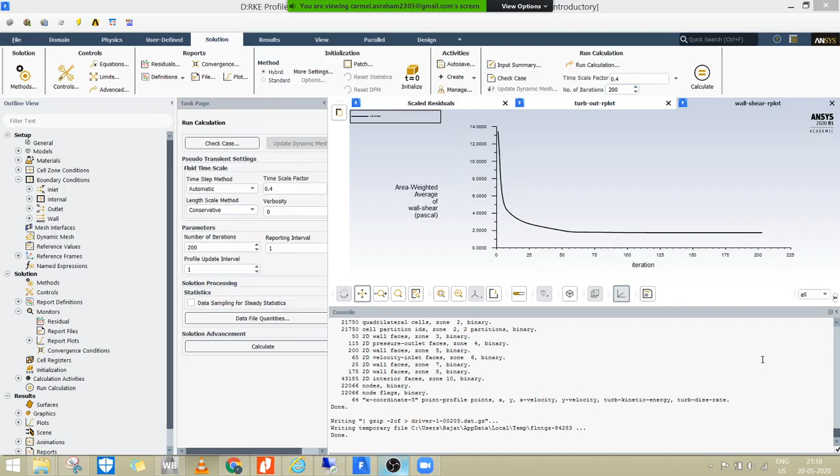Ido, do you want to say something, or did you talk? I don't know. I don't remember. No, I guess not. Omkar, do you want to say something? Rajat. Yeah. Mm-hmm.

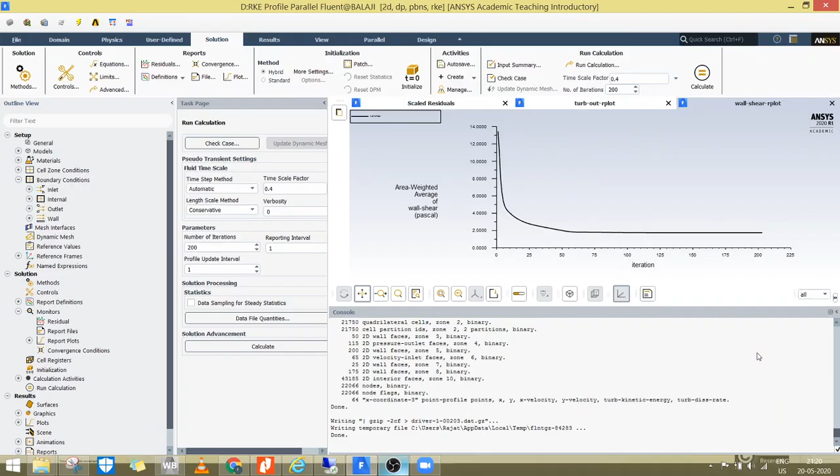Okay, so that's a PDF that I gathered from most of my blog posts, most of the courses I led in Tenzo. Each one of them has a link to a post, which is one of the posts in the blog. You can see the Tennekes and Lumley definition of turbulence. What you can realize from that is that turbulence is a little bit hard to define. It's the last unanswered question of classical mechanics.

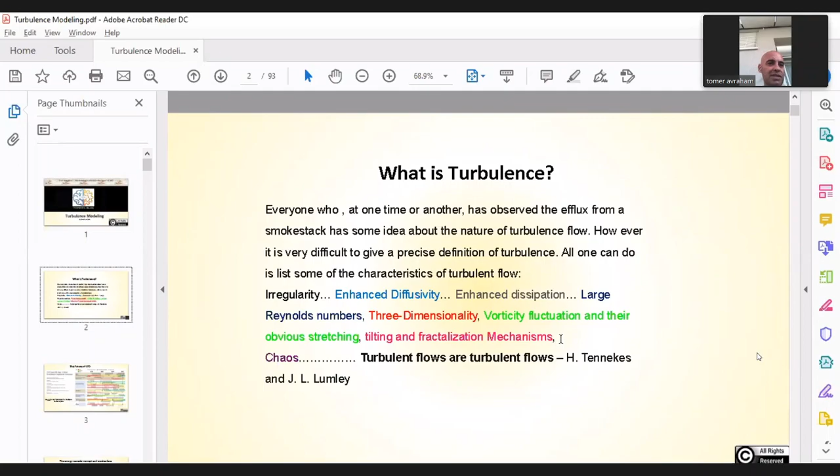There's a $1 million prize, not for solving the Navier-Stokes equations, but for proving there's a smooth solution, or there's a solution at all. Here you see the future of CFD. I love this picture. You can download it if you'd like and read it. It's amazing. But it was written in 2015, and you can see the guys who wrote it. Pretty amazing guys. But they were way off. There's nothing about machine learning and AI in here, but there was an understanding that we have a problem of a human in the loop.

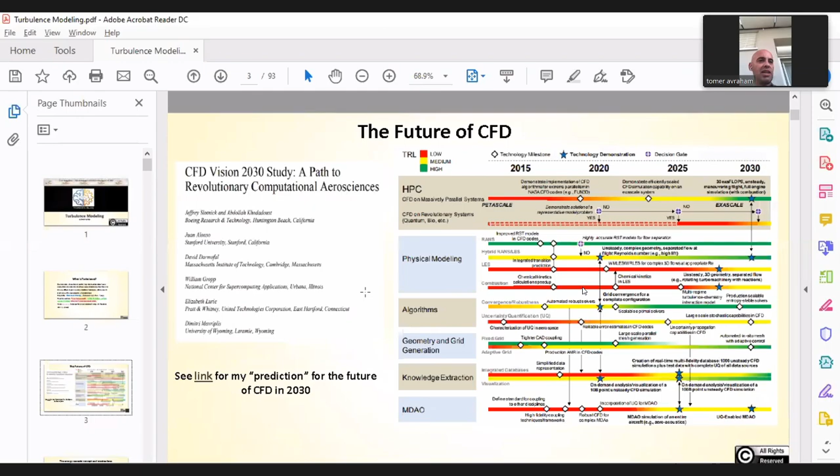So that's what the vision was about. I have a blog, which is pretty pretentious of me, about predictions. Predictions are hard, especially about the future. So everybody knows the energy cascade concept. Big whorls have little whorls, and little whorls have lesser whorls, all the way to viscosity. The famous song.

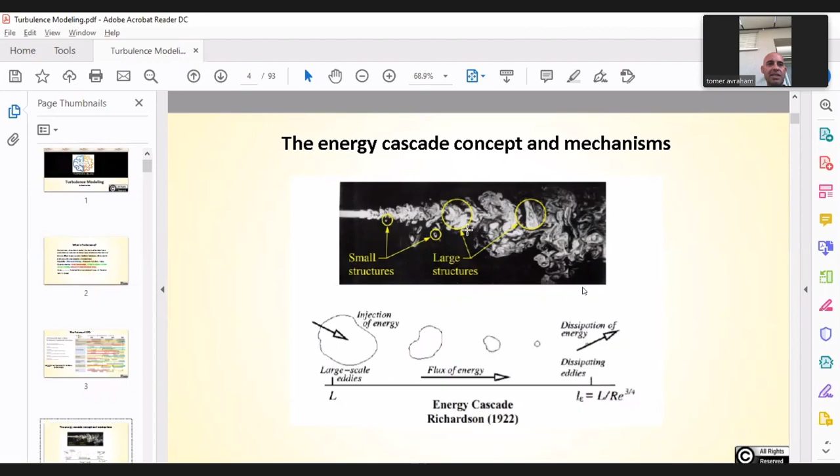Is there anybody here who can see large scale eddies to dissipating eddies? Is there anyone who can tell me what an eddy is? Who would like to try and say what an eddy is? It's a kind of a mechanism, but you can see what large eddies are, small eddies. Part of the vortex stretching effect. There's also a tilting effect, not just a vortex stretching effect. The vortex stretching effect is how turbulence is supposed to happen. But there's also a tilting effect.

Some of this work was open to the world in the 70s when Andrei Kolmogorov's work moved a little bit to the west. And amazingly, and we're going to talk about it later, that's when most of the RANS modeling started, also in the 70s. Most of us attribute turbulence to maybe Navier-Stokes, but it's probably Osborne Reynolds with his famous experiment about Poiseuille flow and a Reynolds number of 2,300, right, at which he saw the flow become turbulent.

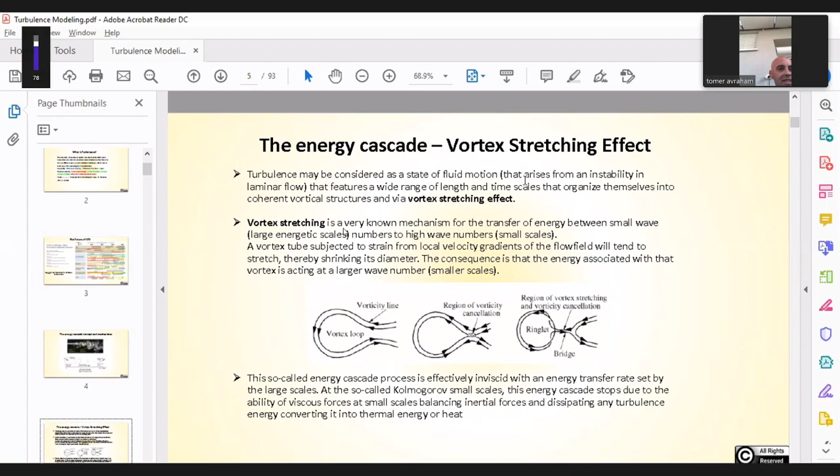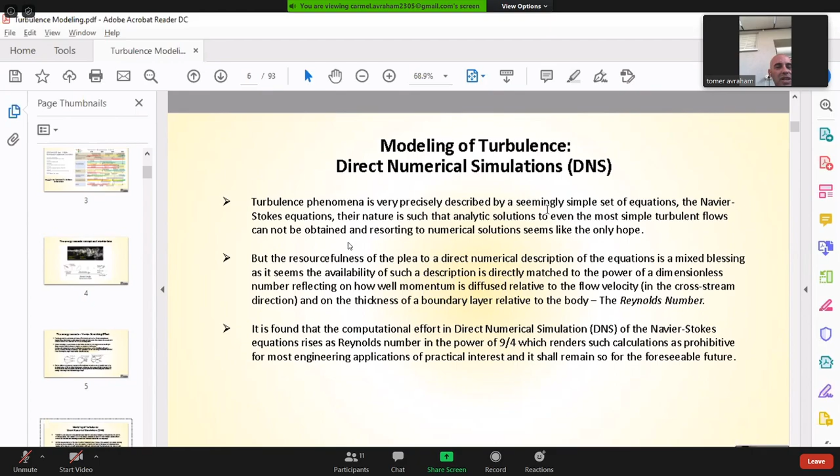Direct numerical simulations, this means we model all the scales. There is no model in the model. In direct numerical simulations, the computer resources rise as Reynolds to the 9/4. If you consider time, it's about Reynolds to the power of 3. That's a huge number. And every publication that addresses DNS says it would not be possible in the foreseeable future.

So that's a little bit about DNS, a little bit about the energy cascade, the universal cascade, the integral scale, the inertial subrange, and the Kolmogorov scale where the eddies turn into heat, and from there there's a spectral gap between the continuum and the molecular range, mostly represented by the Knudsen number. Without it we'd have problems to solve equations. In turbulence, energy comes from large scales, goes through the cascade and dissipates on the small scales. You have some pump pushing work into the machine, and you have losses on the way by friction, by pressure.

Kolmogorov is one of the heroes of mine. He did a lot of work in fluid dynamics. Most of you probably don't know he did a lot of work in computer science too. He has the Kolmogorov complexity, like how you can represent a number with the least amount of data. A number like pi would need an extremely large amount of data to store, actually, but you can use the word pi, and then...

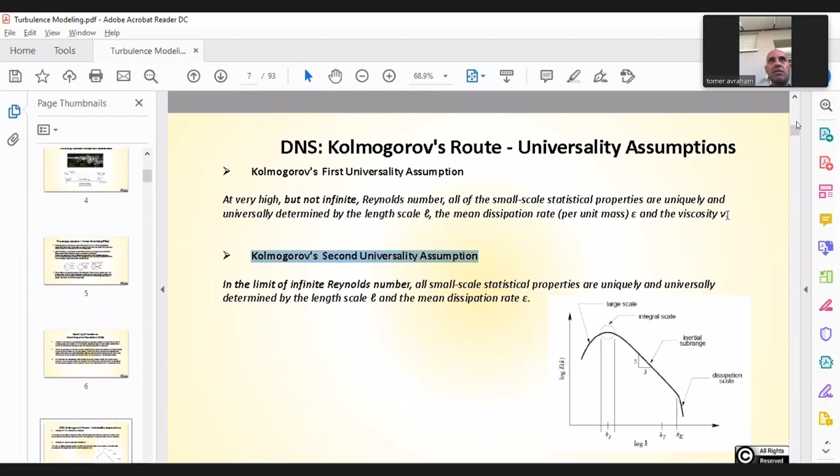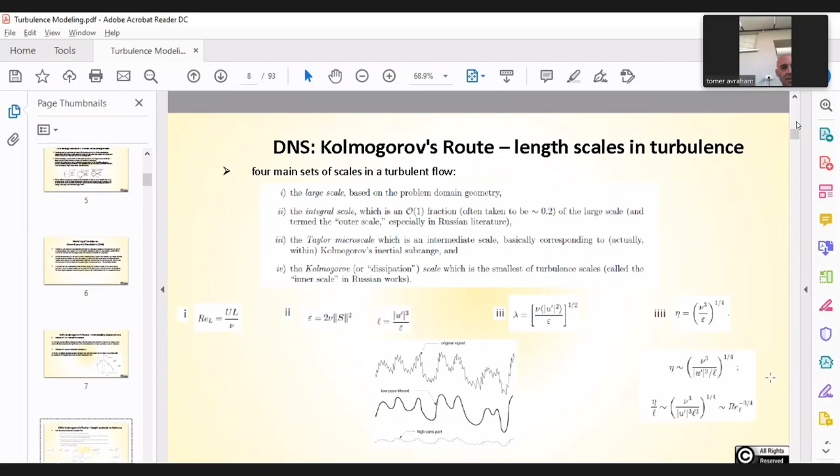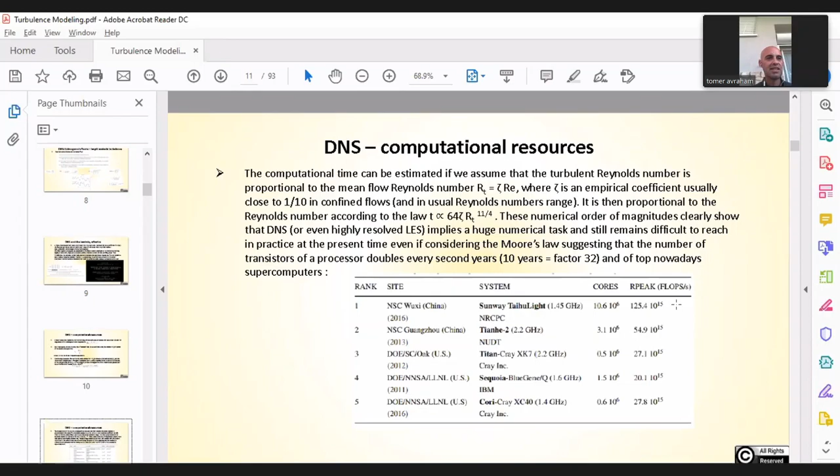That's actually somewhat of a measure of the amount of vorticity that you have in a flow and its magnitude. So we can go on. Computational resources. That's a little bit old. I guess they have now bigger and better supercomputers. Still, Spalart's assumption was that even LES would not be feasible as an engineering tool for mass production till 2070. Okay, now we'll start with the...

So, mixing length theory. I think most of you know about it. You can't really vote if you know about it or not. I have a whole post about it. I'm not going to go into it too much. But what the mixing length theory does, it manifests the Navier-Stokes as emergent equations. Navier-Stokes are able to really predict flow behavior due to the spectral gap that we have between the molecular kinetics and the continuum assumption. We check that by the Knudsen number, and then we can use stuff like velocity and viscosity and temperature and pressure.

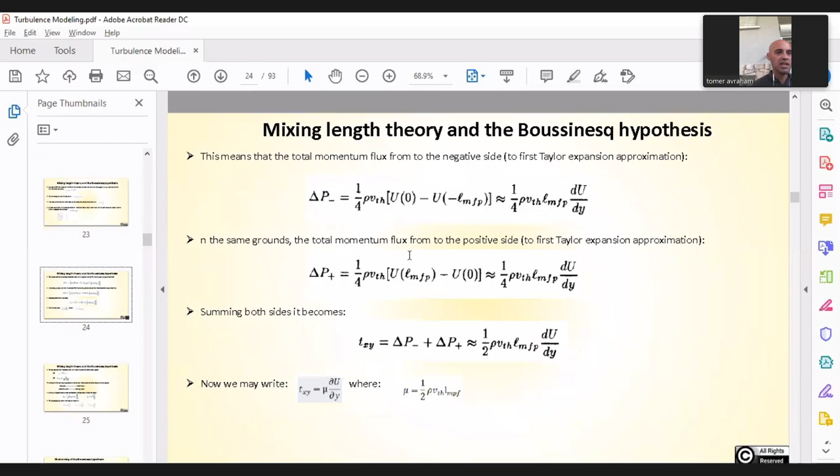These are emergent properties. You can't say an atom has a temperature or the pressure applied on a molecule, because there's no meaning for such stuff. So that's a little bit. Here's the criterion for the Knudsen number. The mixing length theory is something that relates what is a conventional experimental property like viscosity. And it was the beginning of turbulence modeling, the mixing length model,

where we assume that a molecule is a fluid parcel. Sometimes in aerodynamic videos you're told air molecules do that, but no, these are fluid parcels. There are no molecules there. The description is wrong if you use the word molecule. And the mean free path is the mixing length. And then he derived a model where mostly you need to set everything. It's a zero equation model. It works well if you already know the answer, or you made an experiment and know the results, and then you can find the L mix or the velocity mix, but it's not used anymore.

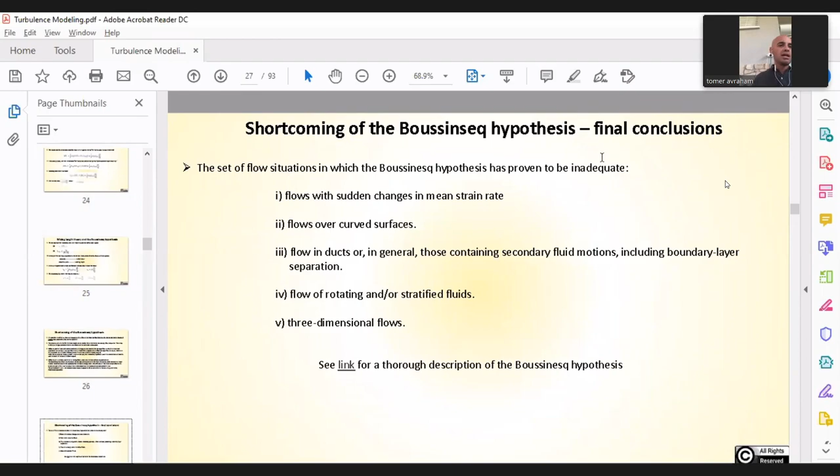It's studied, I guess. The Boussinesq hypothesis stands at the basis of almost everything we do, including large eddy simulation. The Boussinesq hypothesis relates the shear stress to the gradient of the average velocity and the turbulent viscosity.

And by that, here the Reynolds stress. So there is a connection between the Reynolds stress that you see right here and the gradient of the average velocity after we do the Reynolds averaging procedure. And what it means is that we model all of the turbulence.

So it's a little bit funny, because most of the problems solved are turbulent flow. You have some laminar flow problems, like with blood vessels and in micro heat pipes or something like that. But most of the problems we solve have turbulence in them, and we model all the turbulence as long as we're talking about two-equation models. I'm intentionally not talking about one-equation models.

I'm going to talk about a specific one-equation model, which actually is equivalent to a two-equation model. The one-equation model used to be the differential equation for the kinetic energy, and then some kind of specification of the dissipation of the kinetic energy. It's not used anymore. There's no reason to use it. We have enough computing power. You simply won't even find it in code. So I'm not going to talk about it. The K-epsilon model. The K-epsilon model is the most...

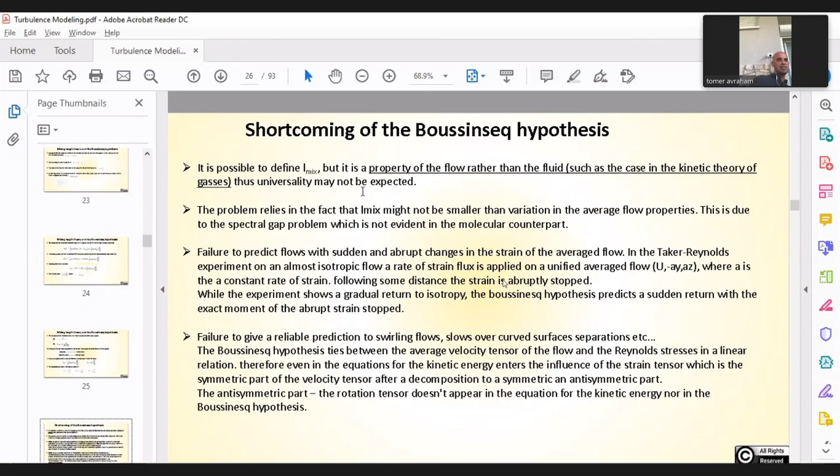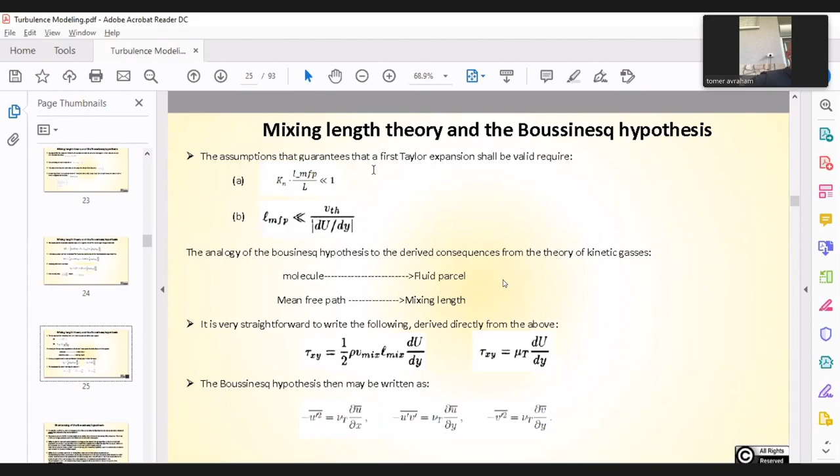We're not going to talk in depth about the shortcomings of the Boussinesq hypothesis, but it's enough to say that it has real problems with swirling flows and curved surfaces, because we take the shear stress as what determines the turbulence, and we don't take this into account.

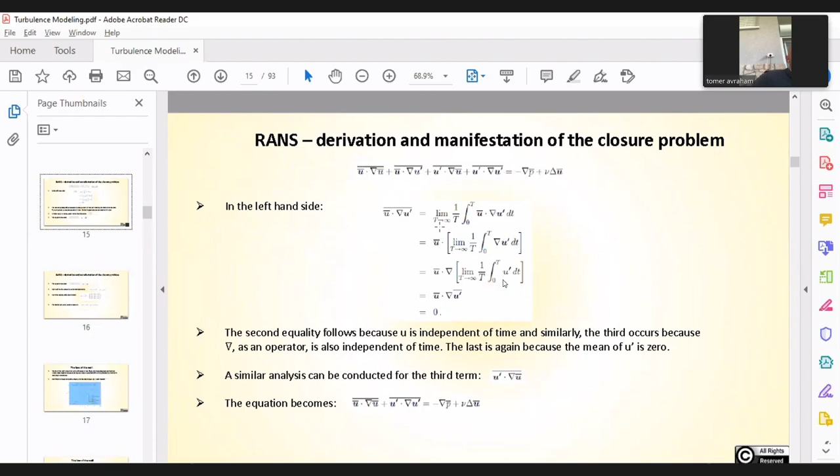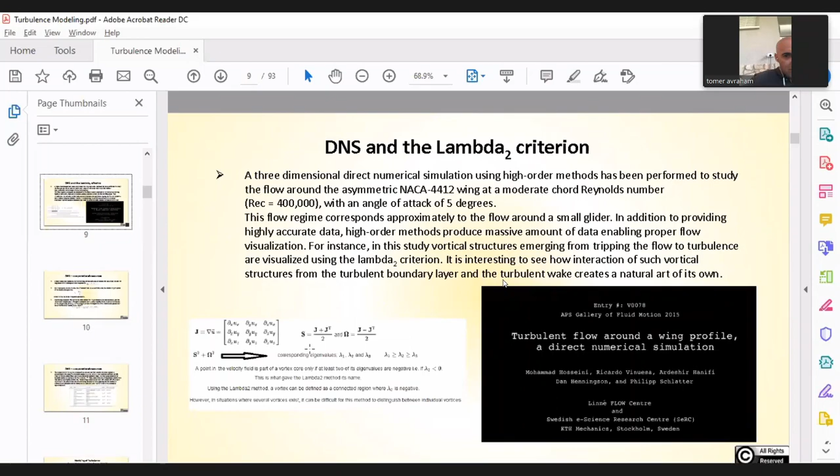If you saw here, there's a little part—when I talked about lambda, you see the velocity. Here we take the stresses, but we don't take the rotational flow. We don't take the part of the rotational flow from the gradient of velocity. So Boussinesq has real problems with curved flows.

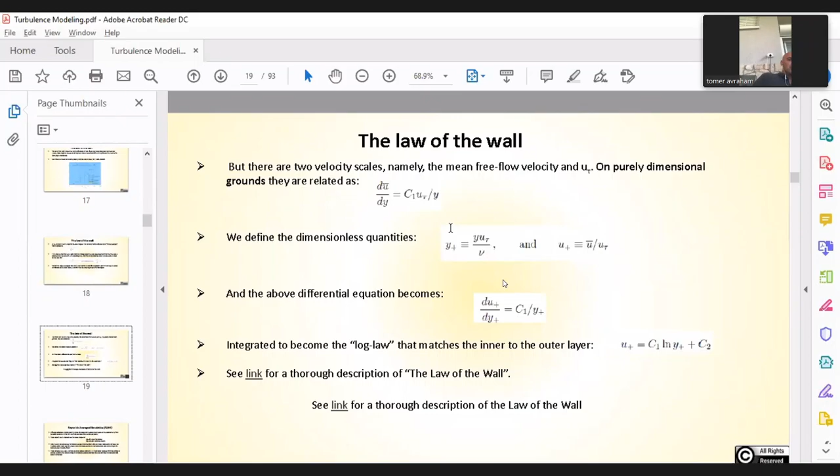It has some more issues, but since you asked about the K epsilon model, we're going to jump right through one of the arguably most important topics, which is the law of the wall, and get to the K epsilon model. Okay.

The K epsilon model was derived in the old school of Imperial College London—Launder, Jones, Spalding, all these guys. The first K epsilon model derived is what we call the standard K epsilon. It's a high Re, so a high Reynolds model, which is kind of cool when you're talking about certain applications.

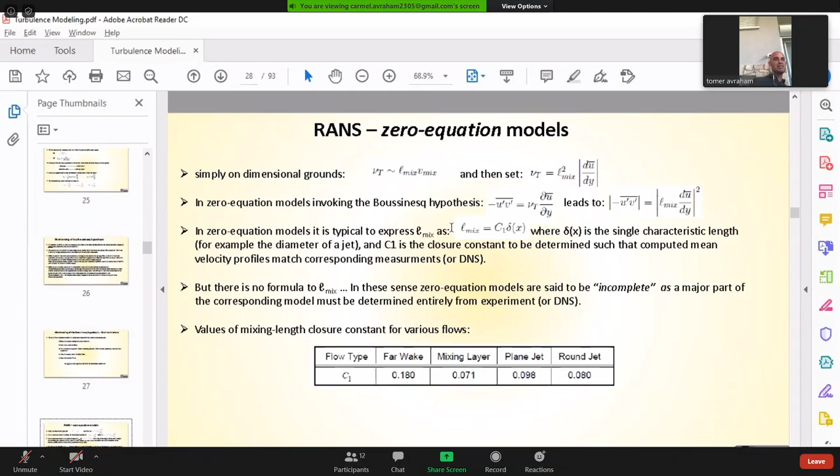But not all flows are high Reynolds flows, and then you kind of get messed up. You can use it because it's simpler—algorithmically simpler, less arithmetic processes. But the standard K epsilon model, I think, is rarely used. Most of you are told by someone: don't use that, use the realizable model instead.

So, directly to the K epsilon model: we have two additional equations. You can see the relation between the eddy viscosity—here it's the dynamic one, but it doesn't really matter, it's just rho, you can put it here—and then it's the kinematic eddy viscosity. And there is a relation between the kinetic energy and the dissipation of the kinetic energy.

You solve two more differential equations, one of them for the turbulent kinetic energy, solved together with the Reynolds Averaged Navier-Stokes equations. The issue with the standard K epsilon model—most of what's discussed here is on the standard K epsilon model—is that it has some problems.

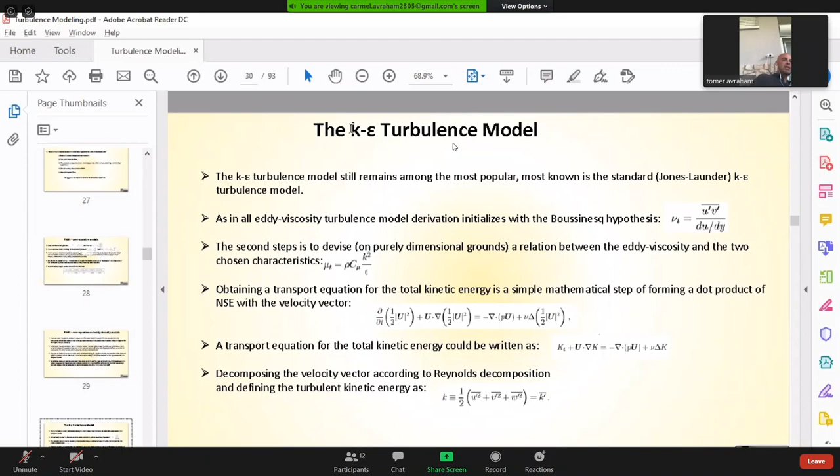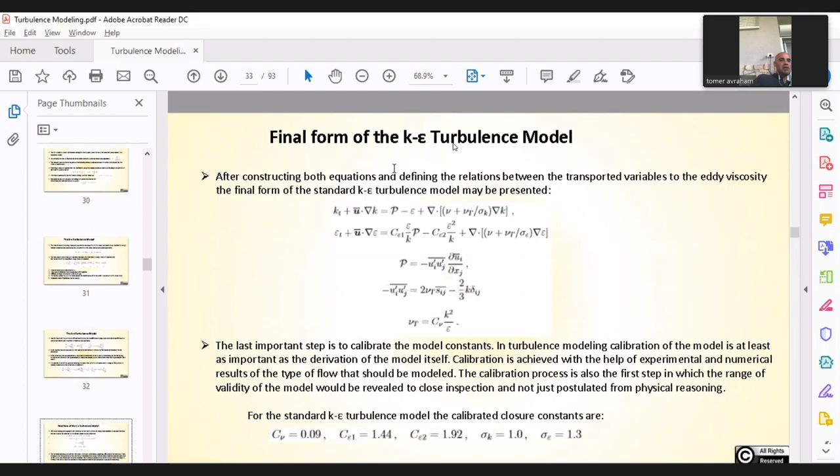It showed that it predicts separation too early compared to what's found in experiments, when we're talking about, say, an airfoil or wing. This means the flow becomes turbulent a little bit earlier. And it's a high Reynolds model, meaning you can only use it when the Reynolds number is above 100,000.

Another major problem is that we didn't talk about the law of the wall yet, but the turbulent boundary layer is comprised of three layers. One of them is the viscous sublayer, which is Y plus. Everybody knows what Y plus is.

If someone wants to say, I don't know what Y plus is, I want to go back and explain what Y plus is, you can say that after I answer this question. Sorry to interrupt—so it has about the Y plus part, like I've studied it, yeah, but is there any physical meaning you can provide to give more intuition to it? Because for me...

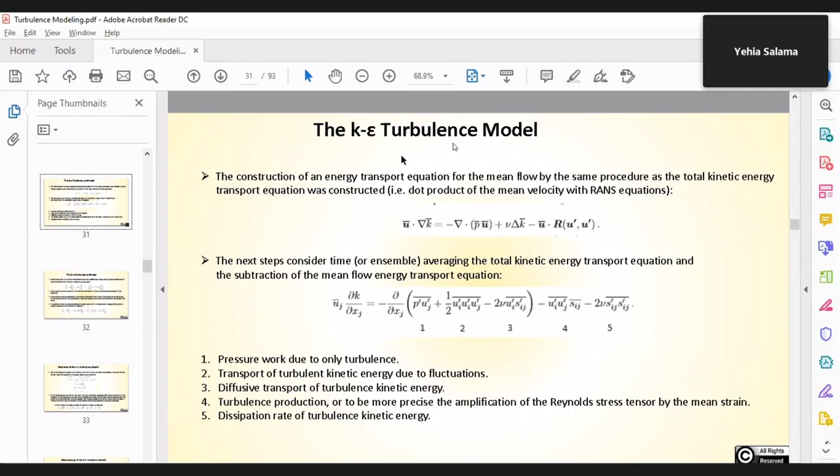This part is between Y plus—it has no dimensions, okay. But you can calculate a Y from this Y plus, even you can see it in the PDF. It's between 1 and 10. There's no smooth connection between them; the connection comes through perturbation theory, which we are not going to talk about.

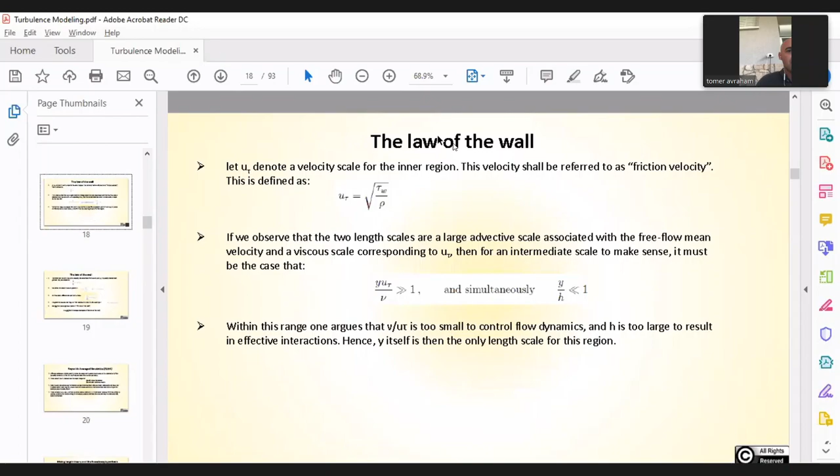Do you want to continue until after 7:30, or do you want to do another Zoom sometime else? That's completely up to you. I'm okay with it, we can go to late, we can go late if you want.

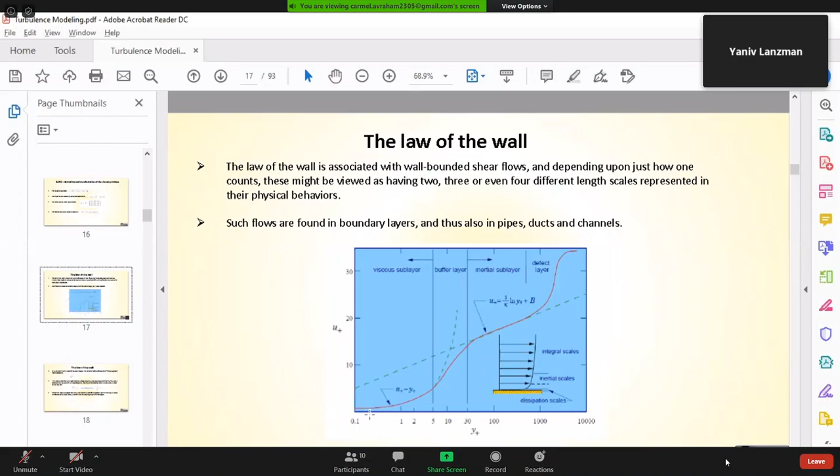Sorry to interrupt. But in a way, the law of the wall that you've just showed is one of the fundamentals in every wind tunnel. I'm talking about this because it's directly connected to what I'm going to tell you about the K epsilon model.

Okay, so this one is the viscous sublayer. It's actually linear, also called the laminar sublayer. This is a buffer layer. Usually in ANSYS Fluent, they use a number which is 11.225 — below that, it's a viscous sublayer; above that...

The log layer has something very interesting in it. It's longer as the Reynolds number is larger, which means that if I have a low Reynolds number, like in turbo machinery, then the log layer could end at about 400, and I need to keep that in mind to have fine resolution to capture the log layer. If it's an airplane, then the log layer can stretch to about 5,000. So there's intentionally no number defining the end of the log layer, and that's very important.

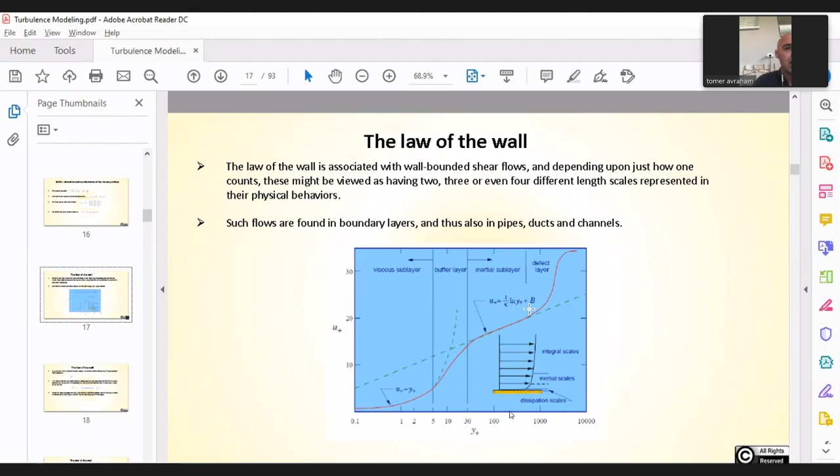After that, it's the defect layer and the free flow. Going back to the K epsilon, what they found out is that the epsilon equation could not be integrated with Dirichlet boundary conditions — meaning epsilon equals 0. It could not be integrated to the wall, which means the model is very problematic. We need something to overcome this.

If it's the standard K epsilon, then what we usually do is use wall functions. We use the K epsilon above some Y plus equal to 30 or even 70, and then connect some wall function which gives us a velocity there — the velocity is not 0. There's no non-slip boundary condition, because we cannot integrate the epsilon equation to the wall. That's why one of the biggest problems with K epsilon is that it is wall sensitive, and it doesn't matter which version of K epsilon you use, it's wall sensitive.

Then there is the realizable K epsilon. The realizable K epsilon has the same problem with being a high Reynolds two-equation model. Most of you are either using the K epsilon realizable or the K omega SST — probably most of you using K omega SST.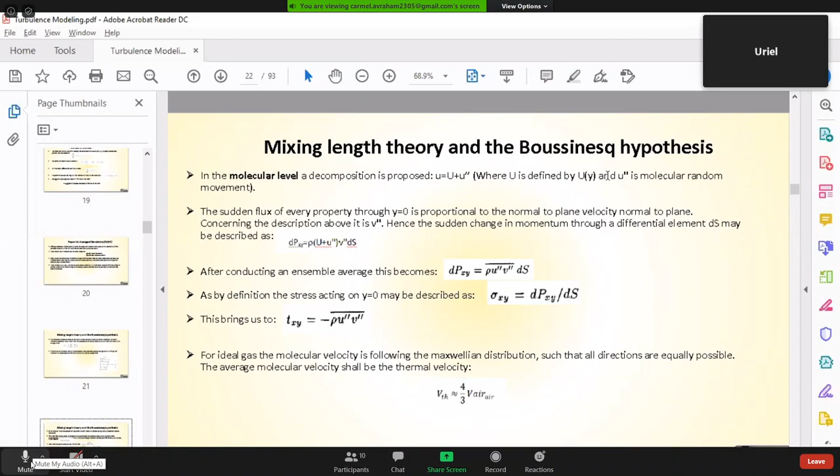Okay, can I ask a question about it? Yeah. About your last sentence, that stagnated flow will perform better.

Will it perform better only software-wise or aerodynamically-wise? I'm trying to ask if you're referring to energized flow, like forcing stagnation points in order to energize the airflow.

No, you just want to predict stagnation when the flow hits a wall, so you don't want to get rubbish there. So it's not just software-wise, it's also aerodynamic-wise.

You could have a place of stagnation — imagine a flute with many pipes going through it, one flute with pipes along the way and a wall at the end. You have a stagnation point there. You want a model which can raise the pressure correctly to divide the flow between those pipes.

So the realizable model has some advantages in this regard. And you don't need to play with the constants — there are constants which were derived by experiments. Usually there's no reason to touch them unless you know what you're doing.

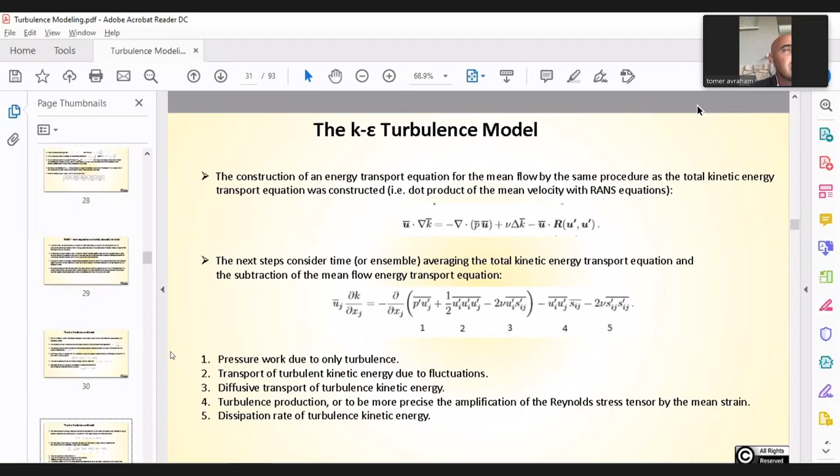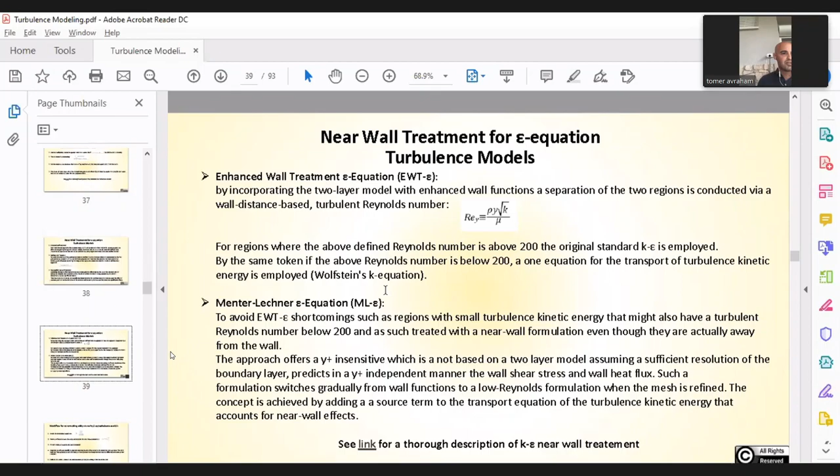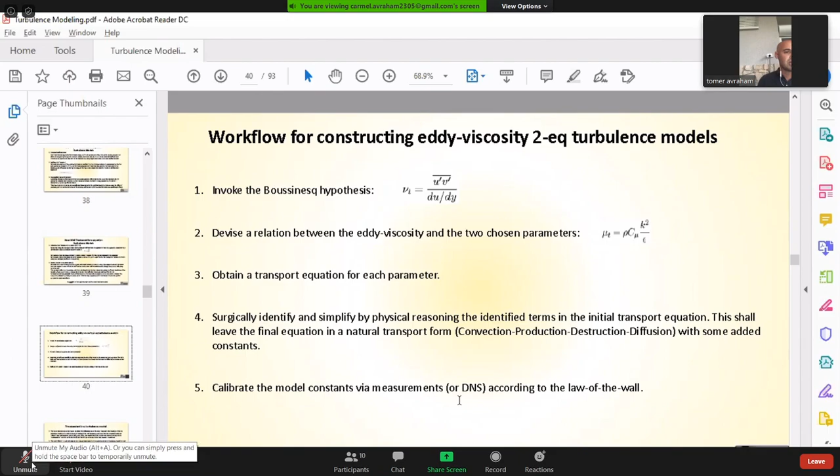And then there's the Bradshaw hypothesis, which I'm going to show you. Near wall treatment, you can read about it also, there's a lot of stuff done on that. I sent you the PDFs, so if someone wants, you can get through the post through the PDF. There's not supposed to be any problem.

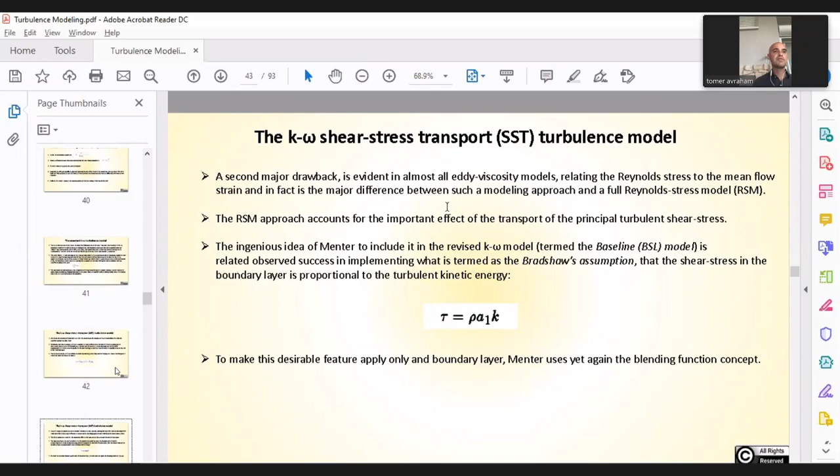So that's the Bradshaw hypothesis. It made a connection between the kinetic energy and the shear stress, and this improved a lot in non-equilibrium flows. That's actually the model most of you use right now. I think the links work here, so if you press any of the links, you'll get to the post and you can read everything you'd like.

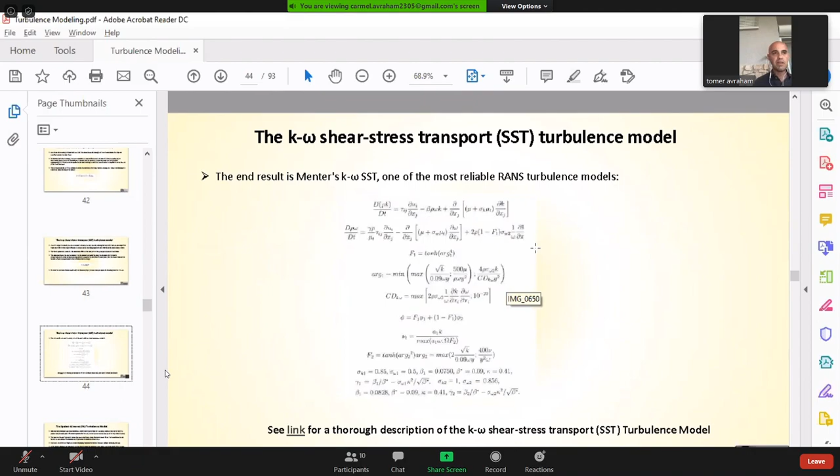Let's talk a little bit about the Spalart-Allmaras model, or if anybody else has a question he wants to ask before, it's a Q&A. I'm kind of a regular course guy, so does anyone have a question? He needs to unmute himself if he has a question. No questions? So, the Spalart-Allmaras model.

Spalart-Allmaras model is a one equation model, but it's a one equation model for the eddy viscosity itself. So if before the eddy viscosity was some C mu times K kinetic energy squared over epsilon, now we have one equation for the eddy viscosity itself. So it's a one equation model, but it should be considered a closed model. We have everything we know, we don't have to guess any length scale or velocity turbulence scale or velocity time scale.

The issue with the Spalart-Allmaras model is that it was... I'm going to have to do a little change here, so you guys should excuse me. Can you hear me? Yes, we can hear. Okay, now it's better, right? Can you hear me now? Yes, we can hear you. You can hear me, not very well, but you can hear me.

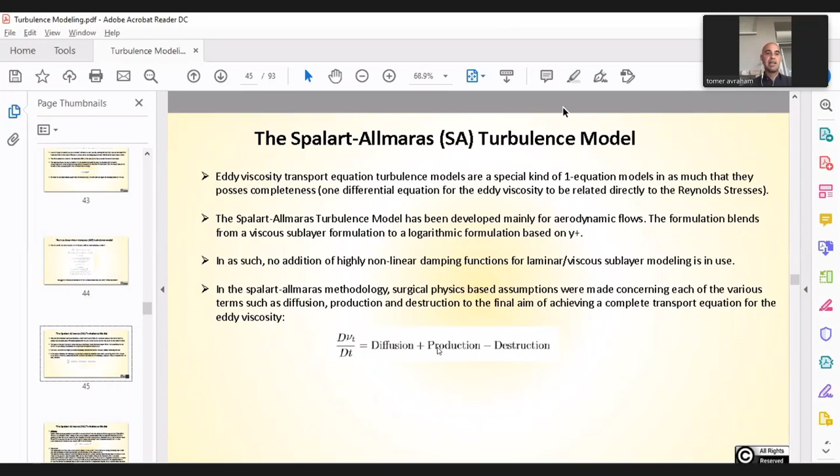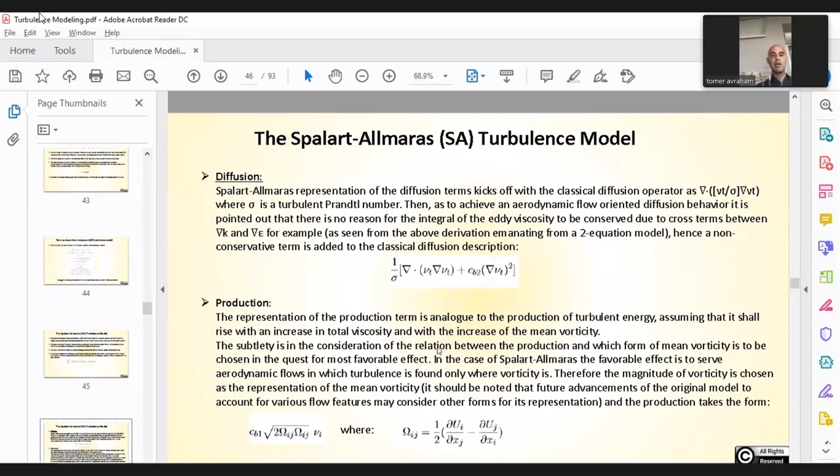So the thing is that Spalart, working for Boeing, derived this model by fine tailoring it to work for aerodynamic flows, external flows. He kept improving the model so it could withstand swirling flows. It's a wall insensitive model, meaning you don't have to use any wall functions. It's the basis for the detached eddy simulation hybrid model, the monolithic hybrid model, which is Spalart's DES model. I think most of the aerospace industries use this model. They can by all means use the K-omega SST, but this one is simply perfectly tailored for aerodynamic flow. So that's kind of cool.

The rotation correction, the transition modeling - I did my thesis on transition modeling, a specific kind called bypass transition. Usually you find bypass transition in turbo machinery. Bypass means it bypasses the natural Tollmien-Schlichting wave kind of way that we usually find on airplanes - little disturbances which turn to coherent structures, which turn to turbulent spots, and then turbulence.

What they did is they used a large amount of data, and that's why it's called LCTM, local correlation transition model. It fits quite a few mechanisms of transition, although it's trustworthy when prediction of the exact point of transition is not of the most importance. There were other ways to calculate transition until then.

It was devised by Volker from General Electric and Menter from ANSYS, and you can use that if you think you have a transition issue. If I remember correctly, sorry for interrupting, this model is used mainly for ducts, and it's also used for turbo machinery. One of their validations shows a helicopter.

But yes, in ducts, especially when you take blood flow as not a Newtonian fluid and you have low Reynolds number, the transition model could improve the results by a huge amount, because most of the flow is laminar, and then you have some areas where turbulence develops because of the geometry of the duct, or something like that.

Exactly like that. Because especially, sorry for interrupting again, this model is used a lot, especially in two-stroke engines. I remember when I simulated a lot of two-strokes for fun, as an enthusiast for racing with the racing guys of Italy. We used those models in order to design the inlets and outlets and the ports.

It's Yaniv, right? Yeah. It's Yaniv talking, right? Yeah. Exactly. We spoke about it yesterday. Yeah.

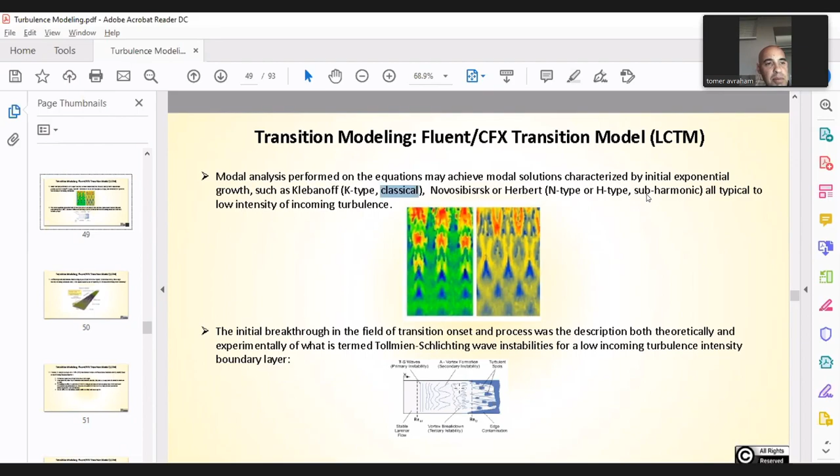Exactly. But again, you should remember that there's no real theoretical basis between the work you see here, which was done by Dan Henningson and Philip Schlatter and all of them, and the work that Menter did. But here you see the bypass transition, my favorite kind of transition.

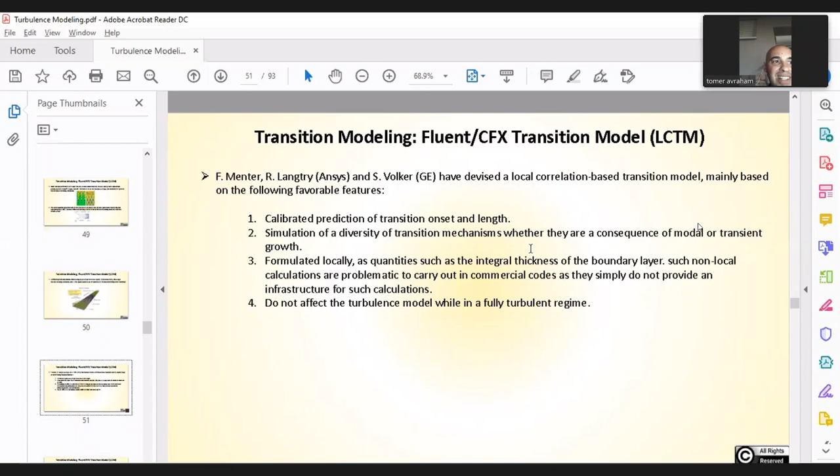Yes, you can use that in ducts. I used it. I didn't use it for a car, but I used it for a duct, which is a vein. Apparently, I had a transition regime there, and you could have seen it, because if you took the velocity profile, you could have seen it's not parabolic, but it's also not like a turbulent profile, which is like a square. Wow, the boundary layer must have been a pain. With ducts. Exactly. Yeah.

Another K epsilon model is the V2F model. The V2F is actually a K epsilon model supplemented by two more equations for V squared and F, which mostly was devised to resolve the problem of swirling flows. My feeling is that the model didn't prove itself too much. It has an elliptic nature. Elliptic nature, when we talk about partial differential equations, is that something that happens in the domain is immediately communicated to the boundary. So it kind of communicates with the wall.

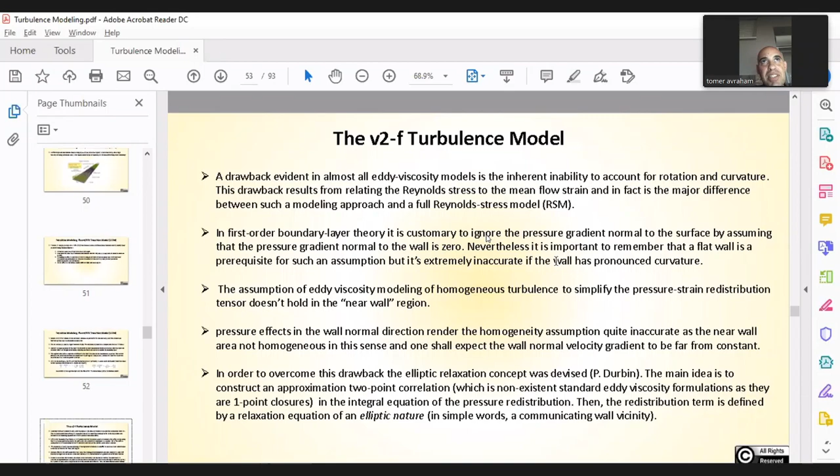It's the same in the K omega model, actually. It's supposed to be a little bit better for flows with rotation and curvature, but in my opinion, and in the opinion of other more esteemed individuals, it hasn't proven its worth, and even in Fluent it's an option. You need to open it. I even wrote here how you open it in Fluent. So that's another K epsilon model.

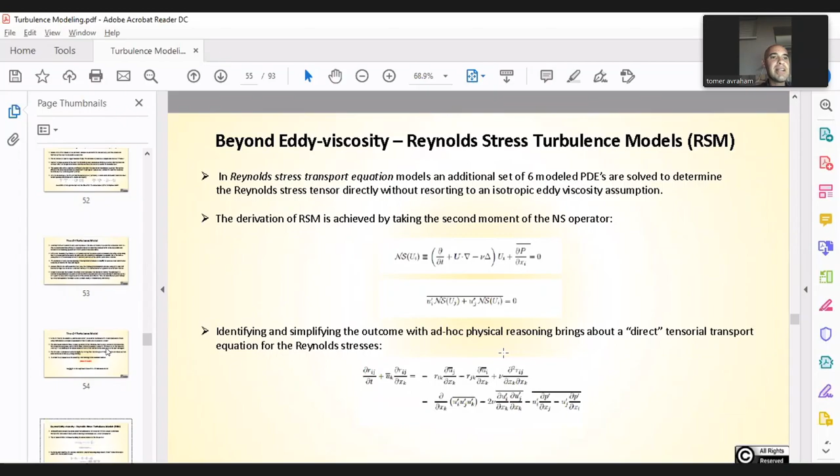Beyond this, there's the Reynolds stress models, which you probably never had the chance to use. If some of you did, please raise your hand. The problem with the Reynolds stress model, it doesn't use the Boussinesq hypothesis. So it solves an equation for the Reynolds stresses. It actually solves somewhat like 6 additional equations beyond those you solve anyway, which is 9 equations, and all of them are very, forgot the word, very coupled. It's supposed to contain more physics, but it's actually very hard to converge, and it's not worth the time, as now we can use hybrid models, which give you more turbulent content. In RSM, in Reynolds stress models, still all the turbulence is modeled.

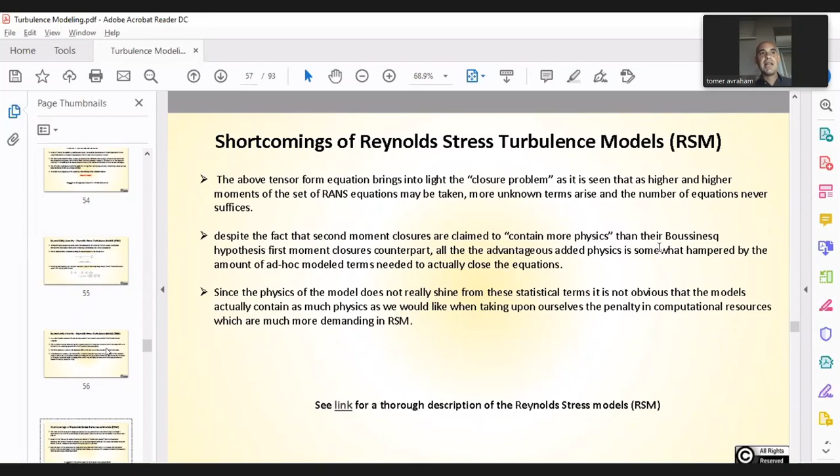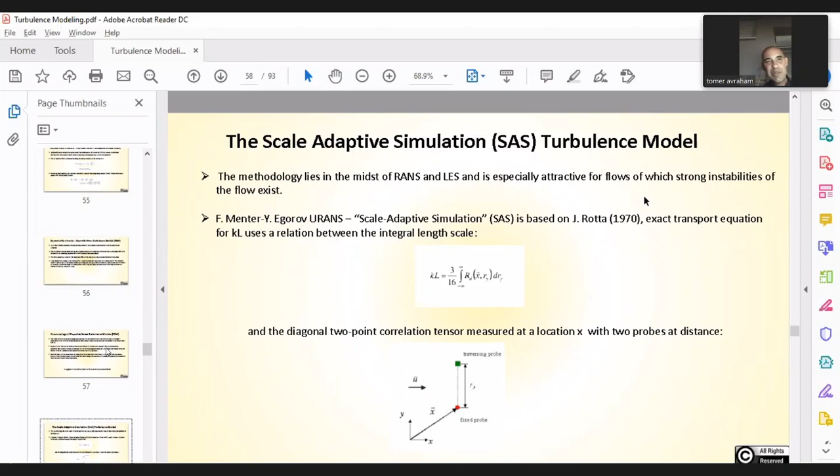Then we go to the scale adaptive simulation model, which I know all of you used a lot. It was developed in about 2003 by Menter and Egorov. Egorov and Menter still work together. I used to see emails between them. They took Rotta's equation from the 70s and made some changes which allowed the model to not break down. What's usually happening is that 2 little eddies combine to 1 big eddy, and we can't see turbulent content in RANS.

This doesn't happen with the scale adaptive simulation, but as far as I see it, the scale adaptive simulation model, which is a transient model, of course, gives you the turbulence content, but it's mostly colorful for directors. You can't derive second order and higher order moments from Fourier content, which is what you have to do in large eddy simulation, for example. So it's not really useful unless you want to produce really beautiful pictures.

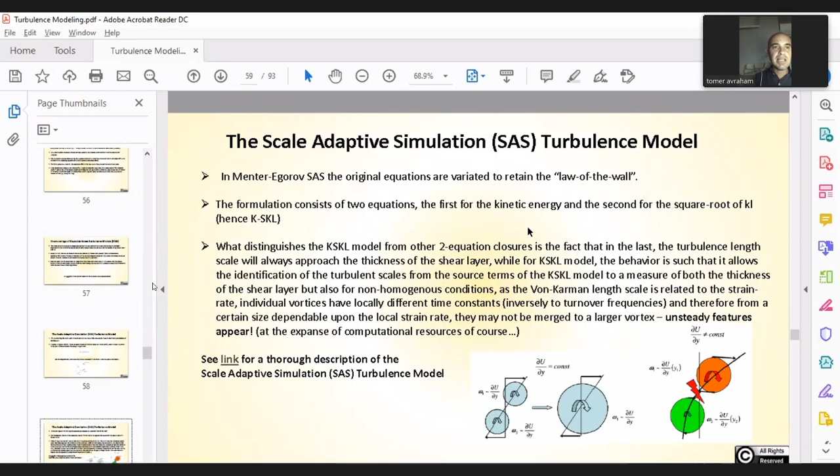Going to ANSYS's recommendations: either use the realizable K epsilon model, which shows good performance in closed spaces, I mean electronic devices where you have turns and stagnation areas. Usually RANS models over-predict corner flows. Okay.

Either they over predict the corner flow. You know what I mean? If you have a square duct, you get corner flows. They over predict the corner flows, or you get total rubbish.

I mean, I call it this, the המפריעים של השכונה. The disturbers, those that make all the noise.

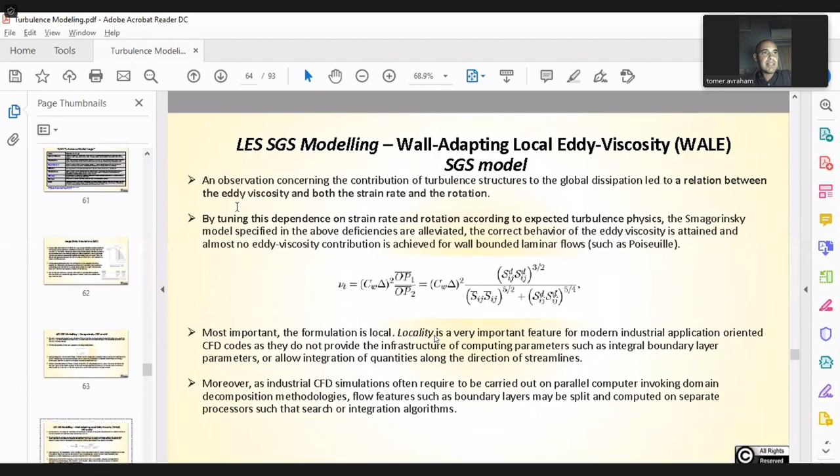Then we're going to have the ability to perform a large eddy simulation of a full airplane. Besides that, you have methods of hybrid-like SGS modeling. LES, large eddy simulation, has much more demands than Reynolds-averaged Navier-Stokes. I mean, the inflow is very important. You must produce a flow which has the right turbulent content, whereas usually when you use RANS, you only define a turbulence intensity and some kind of length scale.

Internet connection is unstable. I don't know why.

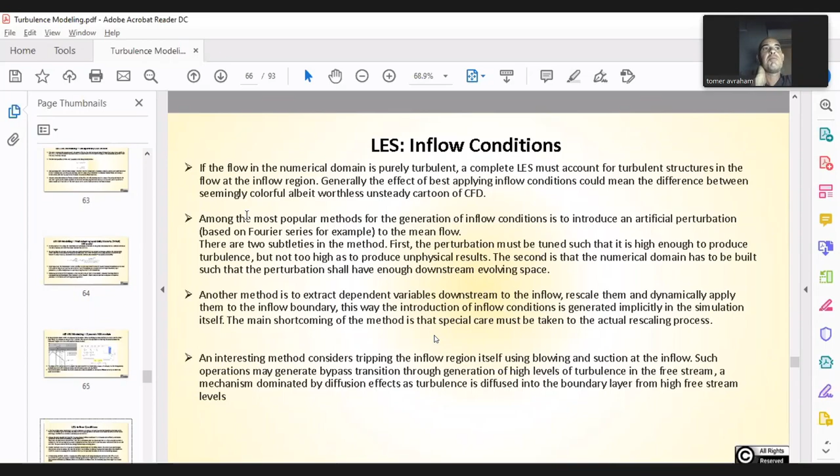So you either have to run a large eddy simulation, if it's a pipe, then use a very long pipe, or you must recycle the results a few times for the inflow conditions, or you can use vortex generators. I think it's all written here, but each method has its issues. You can also trip the flow and create turbulent content, but inflow conditions are very important.

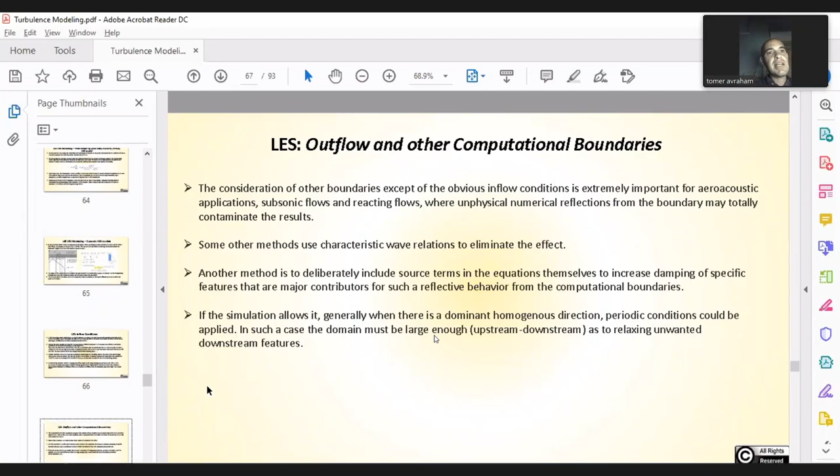Outflow and boundaries are also very important, because if it's compressible flow, an outflow condition could have a backflow effect and ruin the results. So sometimes you must damp the outflow. Generally, there are many issues: spatial and temporal resolution, validation. Validation is very important in

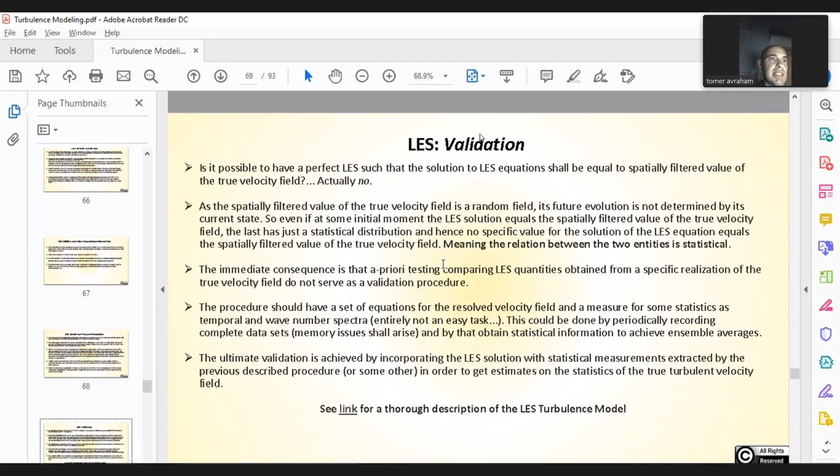large eddy simulation. Usually when we do Reynolds-averaged Navier-Stokes, we're interested in integral quantities like lift, maybe some kind of average velocity and a pressure distribution. In large eddy simulation, we usually want to derive higher statistical moments, to actually understand if we got the right turbulent content, which is kind of an issue. So LES validation is an issue.

Then we go to hybrid methods. There are two kinds of hybrid methods ruling right now. Actually there are three kinds, but two main kinds. One of them is the monolithic, which is the DES family, which includes the detached eddy simulation, where there is some kind of grid size, and if we're lower than this grid size, what happens? It turns to LES, and when the grid size becomes larger, it turns back to RANS.

Then, because you have near-wall problems, you can solve RANS near the wall and large eddy simulation away from the wall, and then you don't have the computational effort problem that you usually have with large eddy simulation. That's a monolithic method. It depends on the grid.

Then there is the zonal method. You actually divide the domain into zones which are large eddy simulation and zones which are Reynolds-averaged Navier-Stokes simulations. Between them there's a gray area which needs to be connected, because when you move from a Reynolds-averaged Navier-Stokes zone to a large eddy simulation zone, you have to have the turbulent content, which you don't get from the Reynolds-averaged Navier-Stokes method. One remedy is to use scale adaptive simulation to have the turbulent content going into the large eddy simulation. There are others.

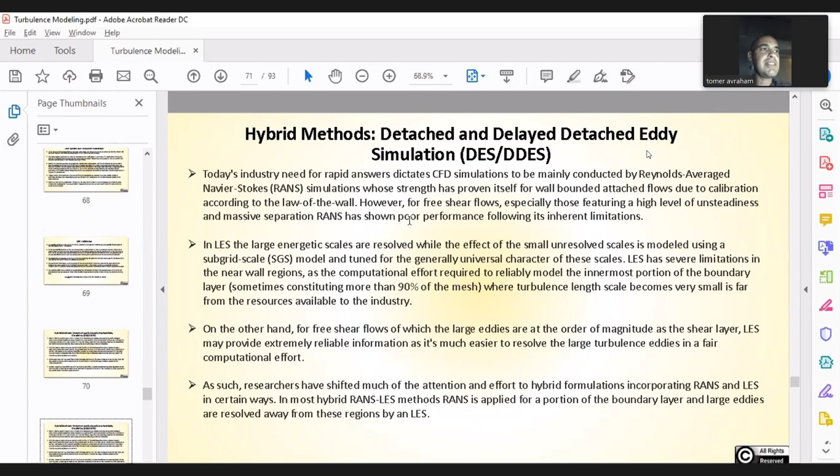That's just short Q&A. It's 8 o'clock. It's getting kind of late. There's a lot in turbulence modeling, isn't it?

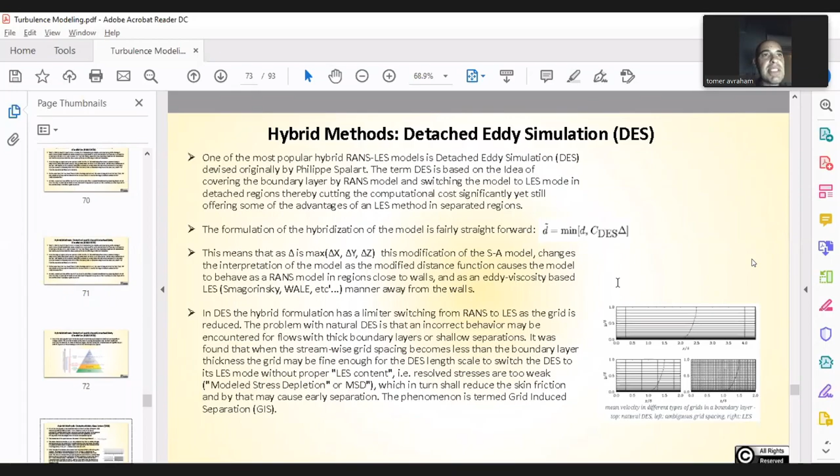Hybrid method, detached eddy simulation. They found a problem called modeled stress depletion, which means the flow turns turbulent, turns to RANS when it shouldn't, and turns to LES when it shouldn't. So they shielded the boundary layer from these disturbances. Out came the shielded detached eddy simulation, and so it goes on and on.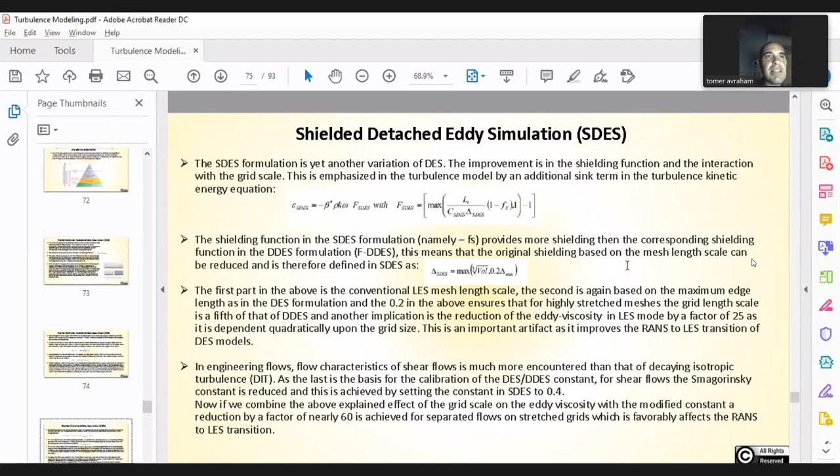And the final one that Menter created in 2016 is the stress-blended eddy simulation, which is not really a model, it's more of a modular approach where you can choose the RANS that you want, because the original detached eddy simulation was with Spalart-Allmaras. The same Spalart-Allmaras you use for RANS, you use for the large eddy simulation. But stress-blended eddy simulation allows you to use your favorite, validated, well-known large eddy simulation with your favorite RANS, and the secret is how the transition between them goes.

And it also allows WMLES. If some of you saw the pictures I put in my posts, that's wall-modeled large eddy simulation, which means you have a very small portion in the innermost part of the boundary layer which is RANS, and all the rest of the simulation is large eddy simulation. And then you can actually do a full airplane simulation. The issue is how you trigger the LES mode, the large eddy simulation mode.

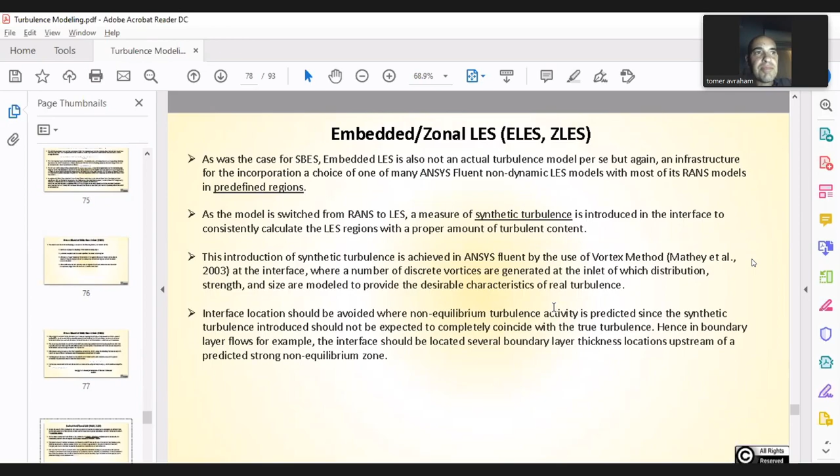Any questions by now? We've talked about embedded zonal LES. These are all the models you have. You have them in STAR-CCM+, and you also have them in Fluent.

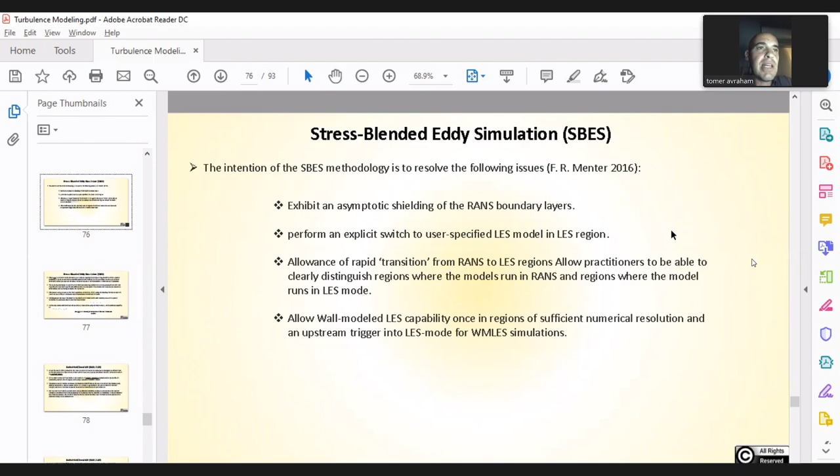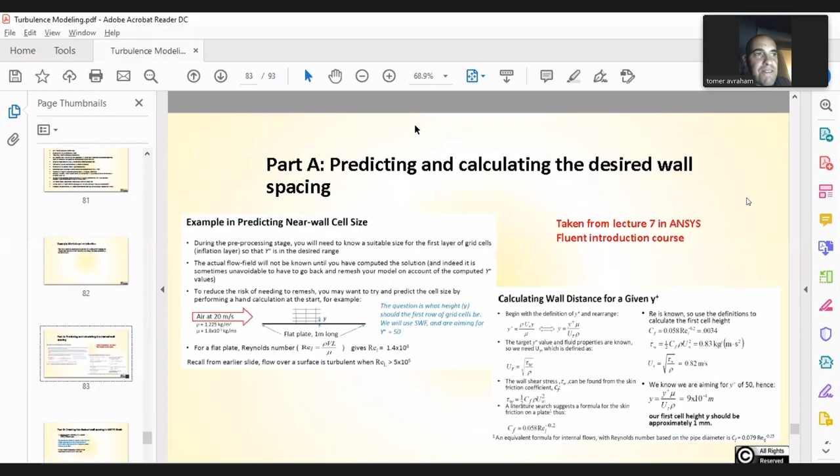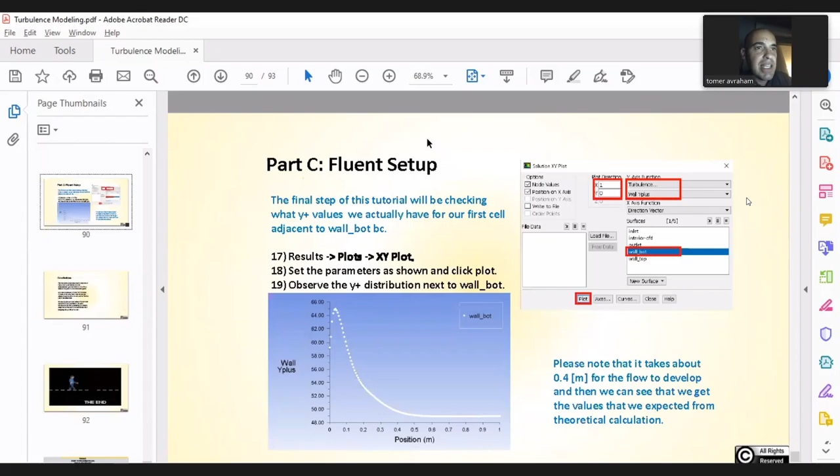There is an example workshop you can do to calculate Y plus. It will give you the same answer as the Pointwise automatic one. If you type Pointwise Y plus, you get a Y plus calculator, or you can use this. I have an Excel if someone wants. It's very easy to do that. It's taken from an ANSYS course. I stole it from them, but this one is mine. Any questions, friends?

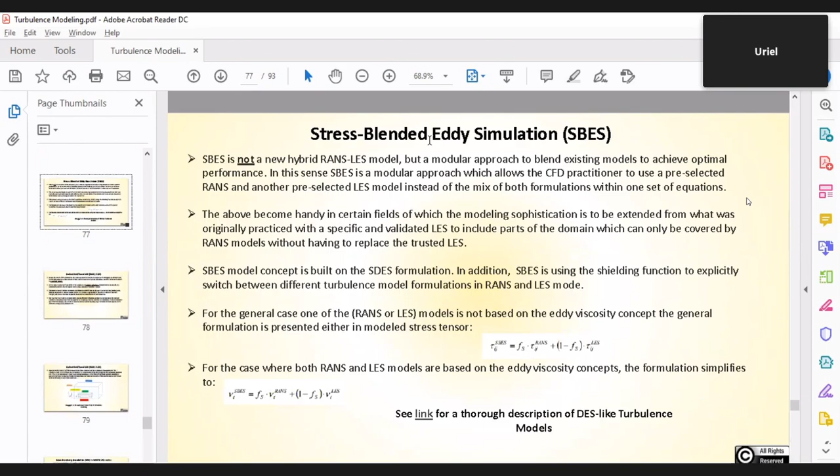Something unclear? Everything unclear? Tough crowd. You can unmute yourself and ask questions. Feel free to ask whatever you want. I mean, it's a very large topic.

It's a topic that in Tel Aviv University was taught for a full semester. I was already into turbulence modeling a lot before I started my thesis, so it was kind of easy for me. The one who taught the course, it was a one-time course in Tel Aviv, teaches in Ben Gurion University.

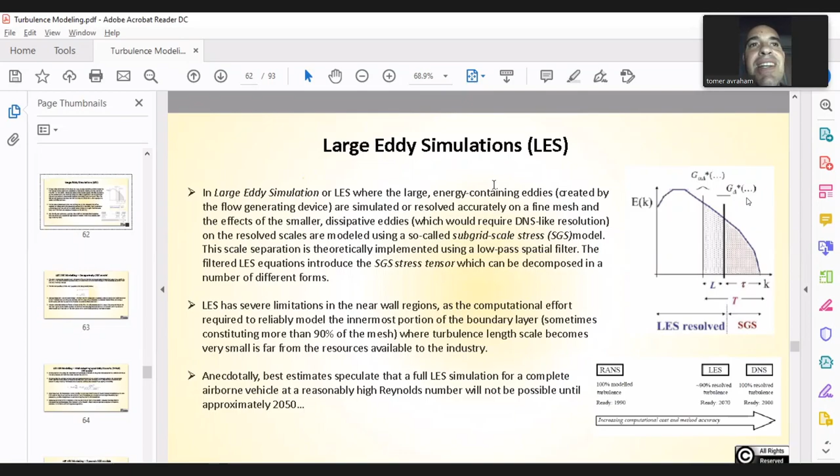He's the brother of the one who invented the RNG, the renormalization group theory k-epsilon model, which we didn't talk about because I think it's too much information. It's gonna make a salad. It's a very rigorous model. What they try to do there is based on vocabulary from quantum field theory, and then the Q&A would become very long. But I'm intending to write a post about the RNG model soon, which I hope you'd like. Any questions?

Sorry to interrupt, but when we talked about the SST model, I had a project once where I had to compare between SST and the K epsilon for supersonic flows, and the K epsilon actually proved to perform much better than the SST. I was just looking at the slide you have open, and there's nothing about that kind of flow, so I was wondering if you have any input or recommendation. It was a converging-diverging nozzle.

Yeah. That's an issue we didn't raise. Supersonic flows and even beyond that, there are issues. First of all, I don't know how far you got with the validation, if you got first order data like lift and drag, or did you do higher order moments. But the issue with supersonic flow is that it's a field which is still very much investigated, especially when you have shockwaves and boundary layer interaction, where it's a problem which we haven't investigated thoroughly. It's still work in progress.